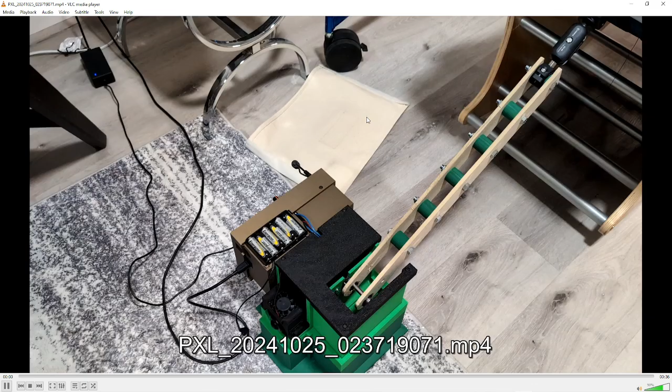So this is a child here in the custom rocking chair with the right padding and all that stuff, covers and everything. And then you can see this green box and this wooden arm that's going out, that's actually rocking the chair. So that's the automatic rocker that I designed. It has various speeds. Right now it's going probably closer to the faster speed here. You can see, and it's working well.

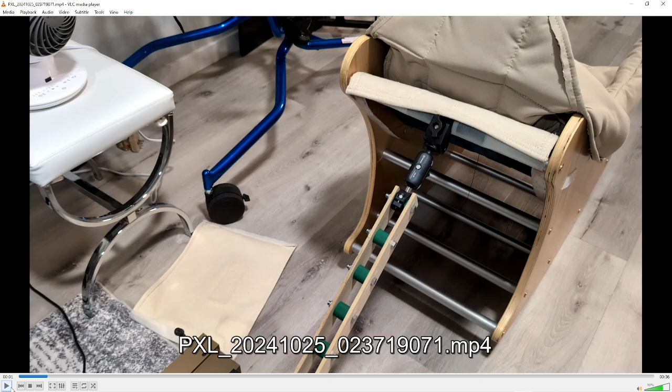Based on his growth, maybe we might need to think about getting a bigger chair again, but something like this arm will be able to adapt to those other sizes. You might need to change the arm length, but that's a very easy thing to change.

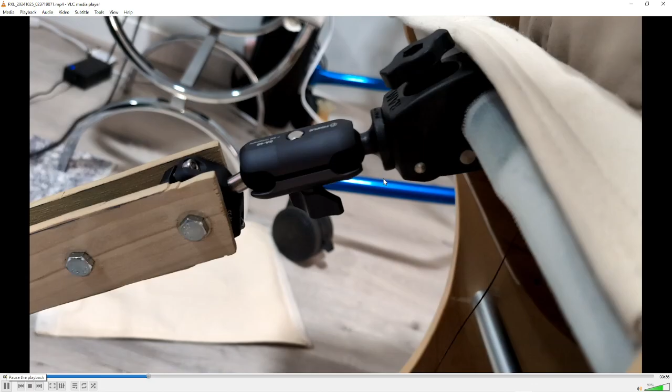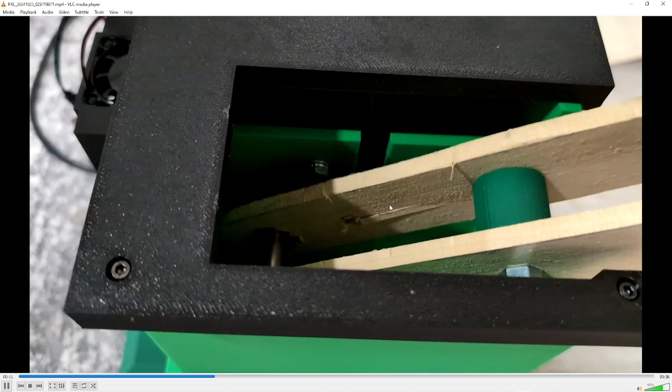Okay, so that's kind of the why and the purpose of all of this. Here's a closer look at the solution. So we've got a RAM arm connection here on a RAM clamp. That's going to the back chair bar. That's rotating on a motor here on a crank arm. And that's all in a 3D printed housing.

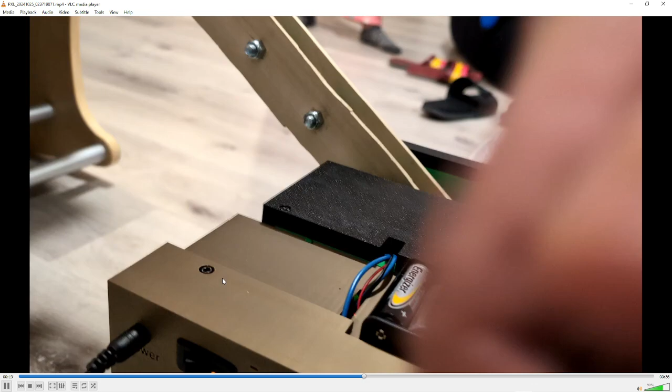And that brown box here has all the electronic controls for speed control and current and all that stuff, which I'll get into. And you can see here you can turn the dial left or right to get it faster or slower. So you can bring it right down to super, super slow, like barely crawling, and then all the way to the fastest desired speed that they'd need. A couple other features on there that I'll get into when we look at the CAD. But that's what we're looking for.

So if you want to make this yourself, you will need a bunch of different things. The first one here, you're going to find everything on my GitHub. At Makers Making Change, we have a template of how to upload open source designs and show them. So they're in these folders. If you want to just get a zip file, you can go to code, hit download zip, and get every file that you need to make this. So 3D print files, all the build files I need, both in STEP and Fusion files. I used Fusion for the design.

Documentation. I didn't make a full assembly or user guide on this. Again, the purpose of uploading these designs here is so someone can make it if they want to. I think that this is a very niche device. If there is higher demand, I'm happy to make an assembly guide, but I just don't think it's really worth the effort at the moment. And this will serve somewhat as that, because I'm going to go through step by step how to build this thing when we look at the CAD. So hopefully, watching this video and looking in the files, you'll be able to get all the stuff that you need to build it. But if you have any questions, email me, DM me on GitHub, or add a note or issue or something. I'll find it.

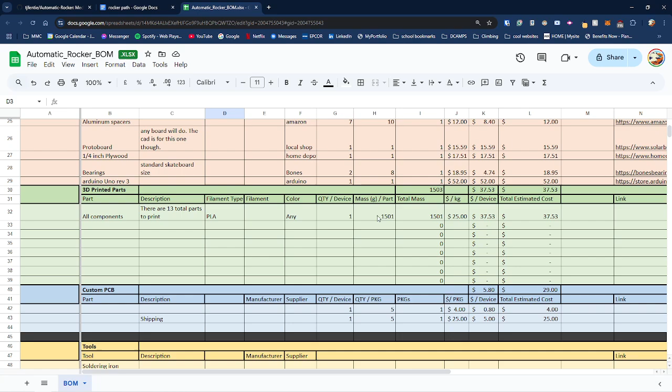tylerfentie@gmail.com. So the documentation of the bill of materials: you get a full Excel sheet here of all of the components that it took to build it. Estimated mass of the 3D printed components, so you can predict how much filament you're going to need. A brief overview of the tools, and most importantly the links to everything. Mostly everything is Amazon. One thing I got from a local shop, but if I was going to rebuild this, I would actually change this part. Again, we'll get into that, but Home Depot for plywood.

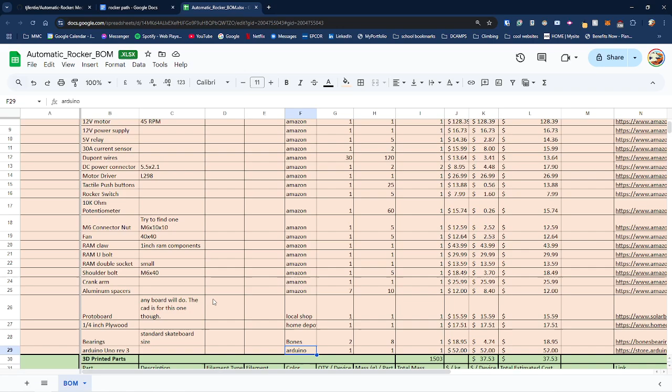Skateboard bearings you can buy at any skateboard store. Bones Reds is what I used here because that's what I had available. Arduino Uno, which you can also get from Amazon, I believe, but I already had one here, so I didn't need to buy one, but you can get it right from Arduino. So you go to the bill of materials, you order all the parts, ready and shipped to you. Then you go to the build files. You can open up the CAD and make any changes that you want. Then, if you made any changes, export those 3D print files. If not, go to your 3D print files, download all the 3D print components, print them out however you see fit, and then assemble it, as I'm going to talk about here soon.

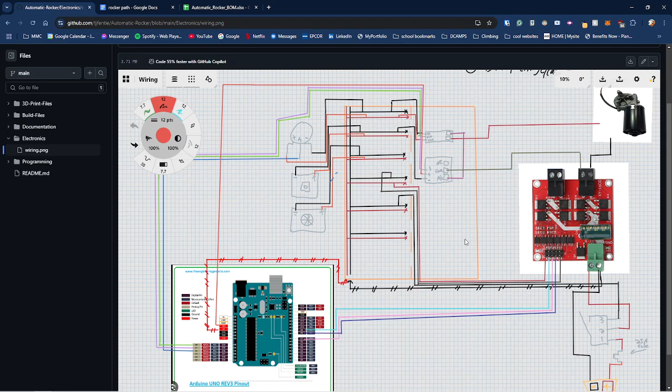I am not an electrical engineer by any means, and that's going to become very evident right here. This is my electrical schematic for all of this. Yeah, I'm sure some of you are probably shaking your heads right now if you're into this stuff a bit more. But this worked for me. Basically, I needed something that I could draw on and play around with, because the biggest challenge I had with this design was learning some of the electrical components. There's been a couple different versions of this, and this was definitely the most sophisticated when it came to the electrical side of things. So you've got the schematic, how to wire everything up here. Again, might not be something you'd want to do on a job, but good enough for me.

So yeah, you got that electronic schematic. And then you get the code. So the code that goes on the Arduino that runs everything basically does the speed control, the automatic shut off on the overcurrent. So if the motor starts binding or the current gets too high, which is indicating something's wrong, then it'll automatically shut off. And there's a reset button, which I'll show a little bit later when we go back to that beautiful schematic that I have there.

So this is what I came up with here. So we're just gonna go through this piece by piece and explain what these components are. This red bar and this blue piece up here is just the path that you just saw before, where this blue thing is at a 40-degree angle, and then this bar is just simulating what the bar of the rocker would do.

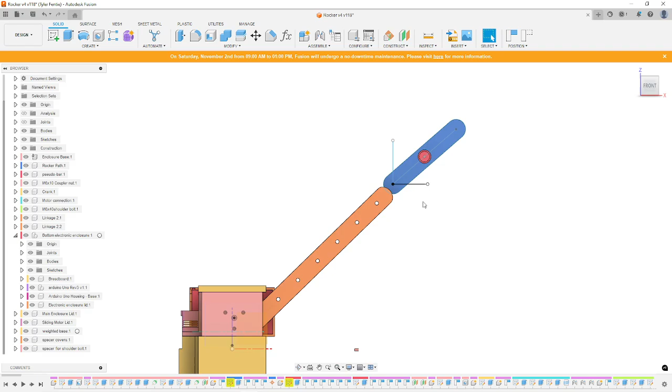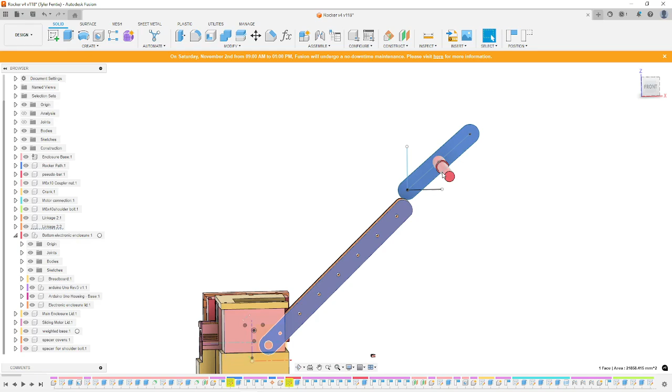I didn't want to model the whole thing and the rocking motion and stuff, so this just gives you a good enough approximation. These two are linked together with a joint so then you can kind of show that motion. It's like a revolute joint around here. So basically, if you look at this linkage piece, it would go here and then go fully around this bar. But I cut that piece off after, so the joint still stands.

But I was able to get an actual model of what I want the linkage to look like. But I'm getting ahead of myself. That's what this is up here. So if anything, we can just forget about the bar and the rocker here, because these are the components that we have. We have two little small floaty components down here that are just used as spacers. Less important, but we'll get to them.

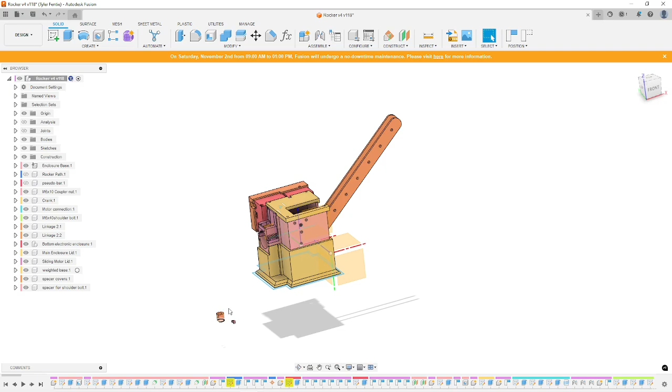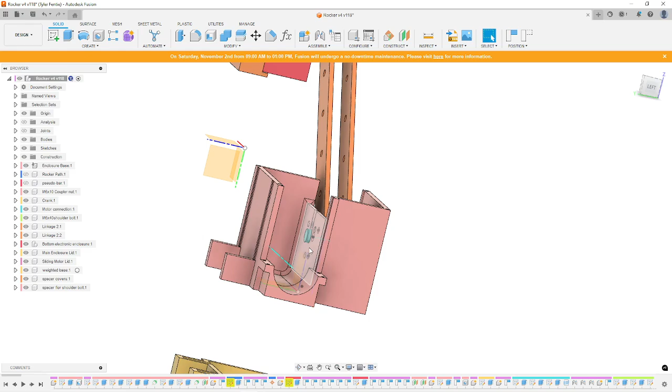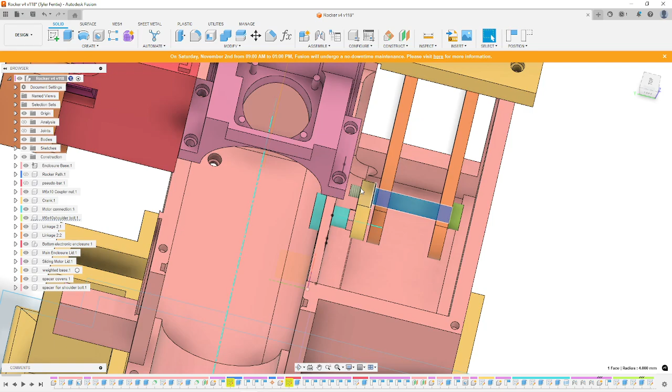Okay, so let's move everything off. Start off here with this pink, salmon color base. This blue knob is simulating the thread that came out of the motor, and then that is a connector nut threaded on here, and that went onto a crank arm. That went to a shoulder bolt that was threaded through, and then bearings were in between here that allowed this to move around as you saw in the video.

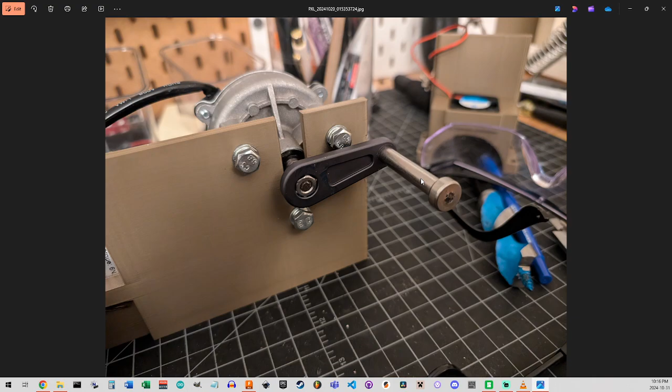So the motor sits in here, and with these three bolt holes, it's able to fix there. That's just something that came right from the motor. I have a photo of that here. This is just a test print when I was testing for alignment. So you got the motor here and three holes, and those bolts came with the motor. So I just made a little faceplate, and you can see that's the coupler nut there that I forced through this crank arm, and then I put that shoulder bolt on there.

So before you actually put the shoulder bolt on there, you would slide the bearings through and the wooden arms that would go to the rocker. But that's basically what that connection looked like. So that's the main housing. Some other stuff on this side, which let's actually get to next.

So here is this electronic housing box. Yes, it is ugly. Yes, it is bigger than it needs to be. I had this thing laying around, and the cost, I mean, again, it's a volunteer project. TETRA is supporting and paying for these materials, so budget was definitely a constraint here. So this is just the size of the proto board where all the electronics fit. So I put that in this 3D printed housing.

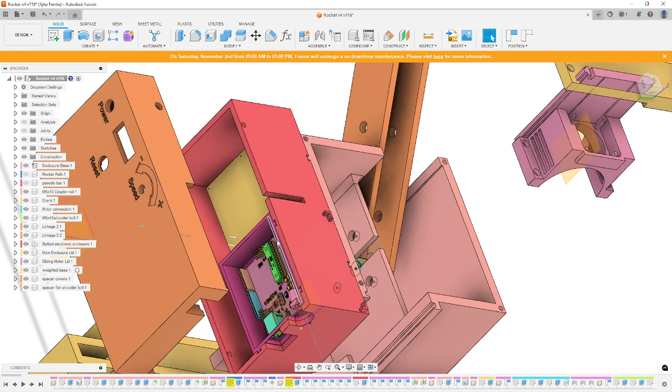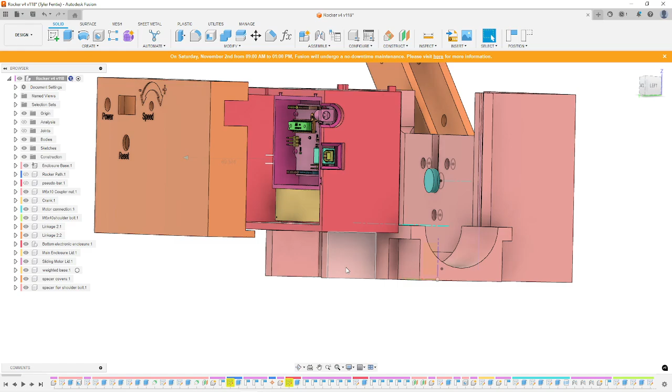This is the Arduino in another housing here, which I don't really have a joint to animate, but this slides in on these dovetail joints. So you got this electronic housing here that slides onto these other dovetail joints coming out of the main housing, and then those rest on these extrusions that I made on the bottom, just so it doesn't go all the way to the bottom, and adds a little bit of support so it doesn't hang off or do something weird.

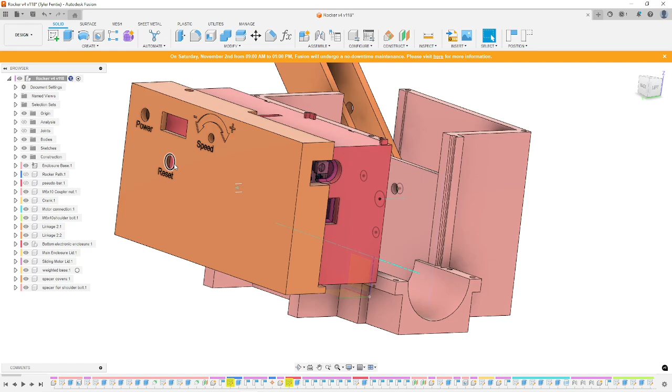And then you got the lid there that goes on and protects the housing cables and stuff. It also has cutouts for the potentiometer, the on and off switch, the power adapter where you're plugging in the 12-volt power source, and a reset button. We'll get into what all those do. We're just looking at the components here so you can get an idea.

Then we got a base that goes on underneath it. So the ground is here, the main parent component. So this goes on. Inside here, there's a bunch of empty room, and that was filled with sand and metal chain to add some weight. Just the motor and the electronic housing themselves aren't heavy enough to not rock with the rocker or get pulled along.

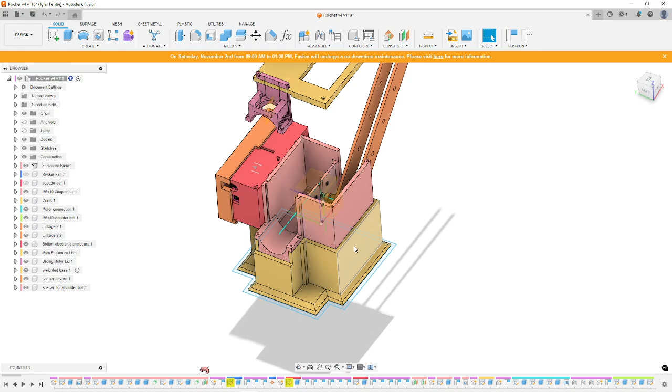So I added this weighted base here that fits on and has three mounting holes. On the top here, you can see there's matching ones. So you would put your bolts through there so the base doesn't fall off. It all just becomes one unit. It's got a false bottom, so you can add some weight.

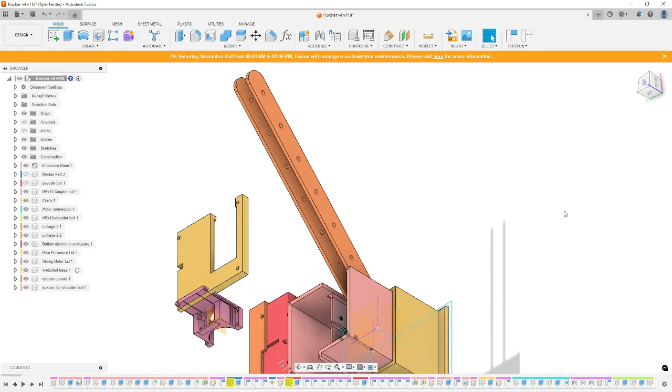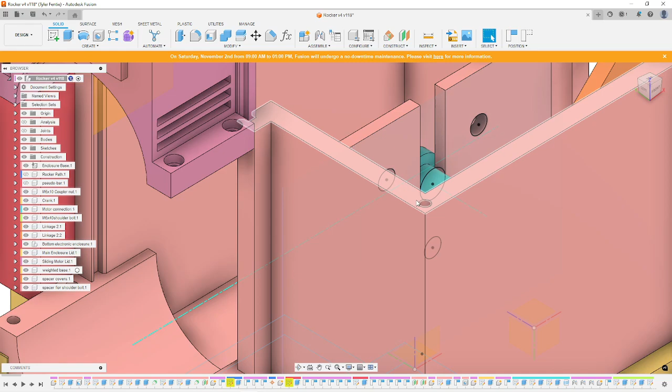Okay. Then, so you have all this stuff. Now we just need to close it up and add a lid. So we got this sliding component here, which also has threaded holes here that you would put a bolt through, and on any component that you see here that just has like a regular hole that you think you would thread something into,

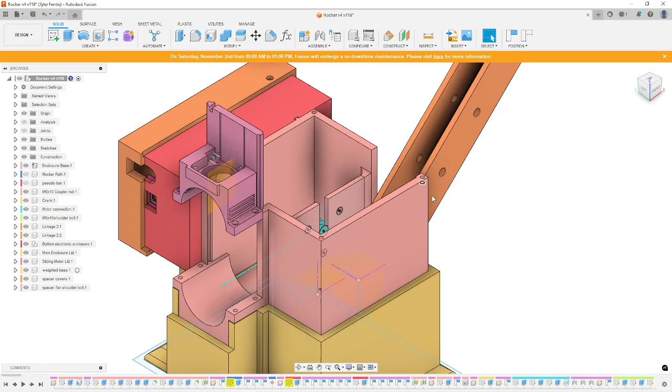I put threaded inserts on all of these, heat threaded inserts. Probably saying that wrong. Brain's not working right now. But yeah, you put the threaded inserts in there, and I just heated it up with a soldering iron, pushed it through the 3D print, and then you could put the

bolts through it. So I can't remember the exact size. I have checked the bill of materials, but the diameter is 4.4. So yeah, I have to check the size of the inserts again, and add that to the bill of materials.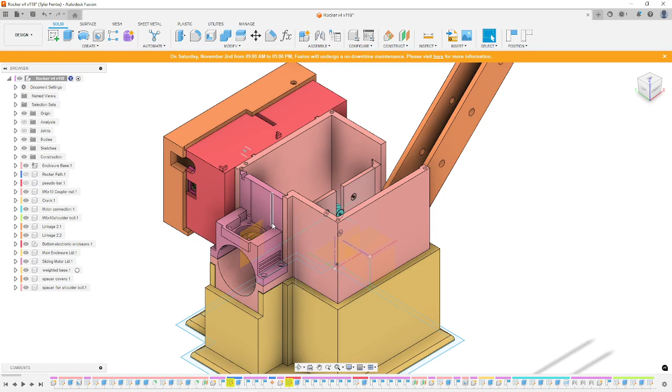So this here would slide down. So we got the 3 bolt holes on this side to keep the motor in place, but the back side also, just so it doesn't rumble and shake. And so this piece is covered here. And then also there's this insert here for a fan, for like a 40 by 40 by 10 computer fan.

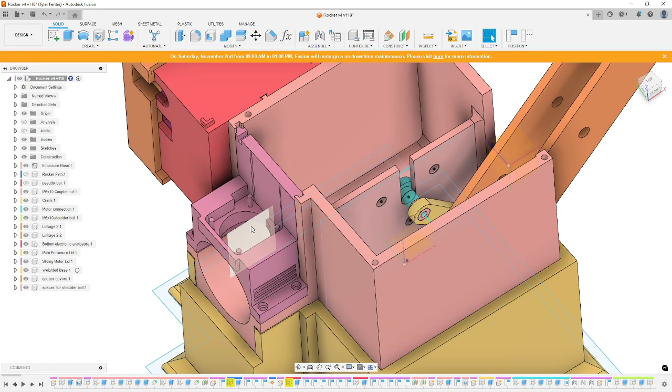The motor never in my testing got even close to its operating temperature or anything, but again, the family might be using this for extended periods of time, so I added that there. You put the housing in there, and then this little cutout and this little cutout on the side here is for the cables to run through. Again, not the prettiest thing in the world, but it did the job.

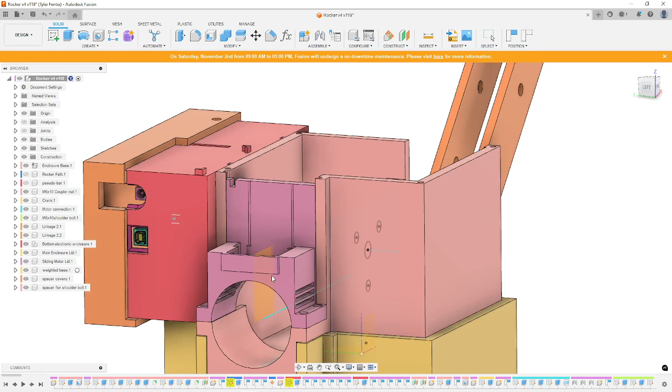Yeah, heat kind of vents on this side. So that slides down, and then you just cap it off with the lid, and the lid goes on there. And there's a little bit of a gap there because again, wires and stuff coming through, and there was a little bit of the support material that goes through here, so this didn't actually fit completely flush.

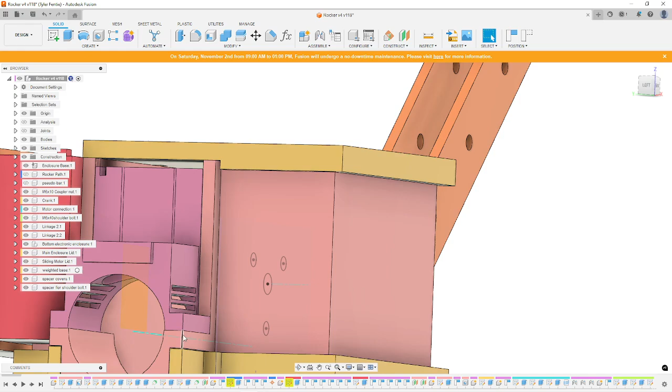So I wanted a little bit of play, so the bolts have some room to go, and again, a little bit more heat escape there. I mean, you have this massive thing open, so it wasn't really an issue, but I wanted that play there, basically. That's what I'm trying to say.

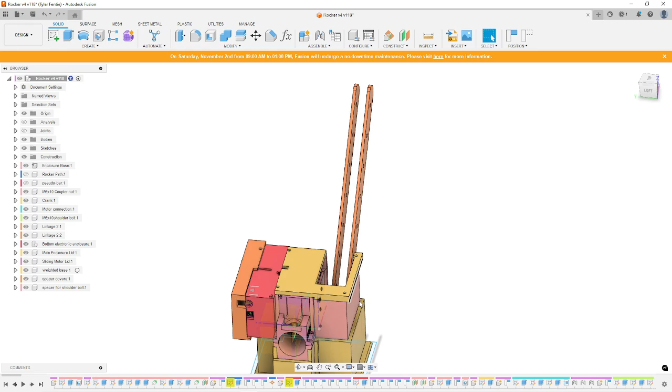Okay, then you get to linkage arms. So the linkage arms have, let me see if I can get a good view here. Right here. They both have cutouts for the 22 millimeter outer diameter bearings. So you'd press fit those bearings in, and then that just becomes one thing.

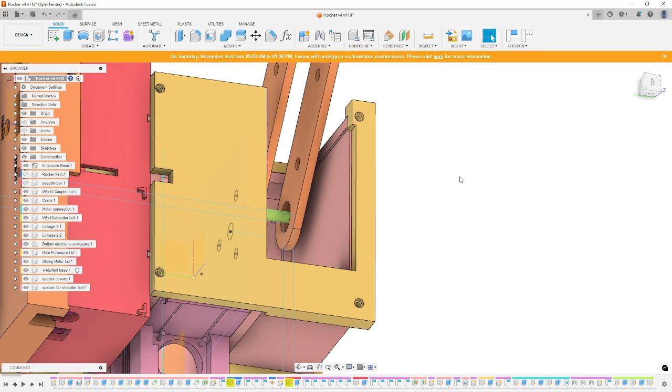You could make these linkages out of anything. Ideally, I wanted to make it out of acrylic, so that press fit would be a little bit more exact. It would look cleaner, be a little bit more rigid than wood. But again, cost and time constraints. Ended up going with wood, and if that becomes a problem for the family in the future, then we'll talk about that with TETRA and see if we can get an acrylic solution.

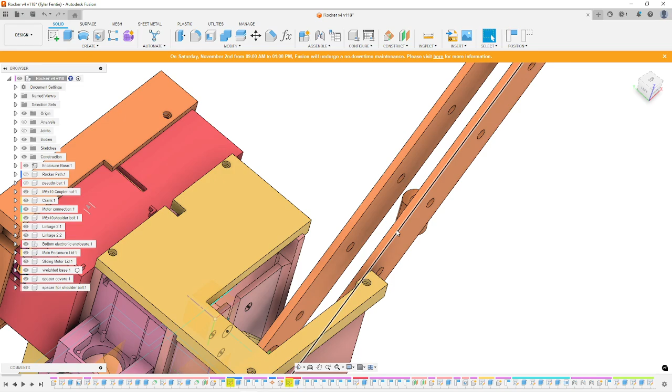So I don't have it modeled here because this was kind of a last minute thing, but these are spacers here that go in between the 2 linkage arms. Mainly for stability, but also so at the very end here you have a linkage that you can attach those arm components to. So we go back to that video.

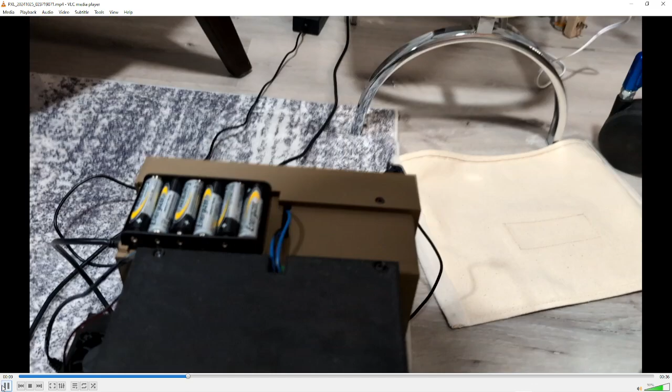And again, down here you can see the crank arm, the bearings going on that shoulder bolt, and yeah. One of my coworkers made a really good point here, that this piece should be covered with maybe some flexible plastic, like a kind of rubber cover, just so it doesn't interfere with the linkage, but also avoids pinch points. Totally agree with that. And next time in Edmonton, we'll swing by their place and see if we can get that done.

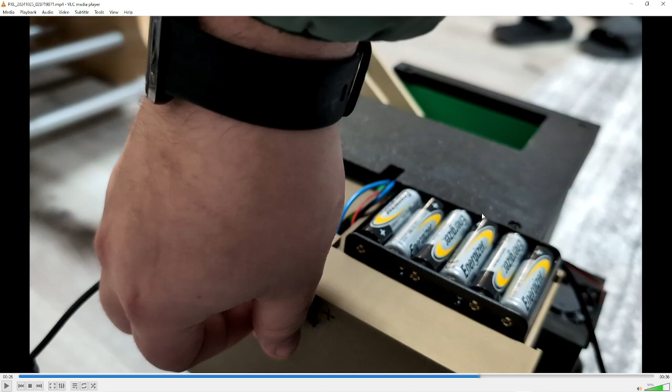You can see here those cables running through the right pieces, and then that fan component in that base. I know there's a better... there it is, right here. Fan component, wire going up through here, and then these two blue wires are going to the motor. The batteries here. So this was a design flaw on my side.

So the power is coming from the 12 volts that ends up powering basically the motor driver and the motor, but not the Arduino itself. It gives some power to the Arduino, but not enough to run it. That's my circuitry design issue. You could definitely have just one power source going in and run the whole thing. However, this just goes to the more motor components.

This battery, you can plug into the Arduino on the left here, and then run the Arduino off these batteries. Works totally fine. However, I found the batteries died a little bit faster than what the family wanted, so I supplied them with a cable that goes directly into the wall outlet through USB to the Arduino too. So the Arduino is being powered through the wall, and there's also another 12 volt thing going to the wall. So two things going to the wall.

Power saving thing is kind of a nuisance and non-ideal scenario there. So that definitely could be improved. That's an opportunity for improvement there for sure. Let's see if I can get a still of the electrical design here. Oh, there you go.

I don't think I'm missing anything there. So that's kind of the housing design. A couple nuances and stuff you'll find if you're looking through the designs. And again, it's open source, so take it, remix it, make it better. All those things. This is not the best version of what this could be.

So let's take a look back at not the programming side, the electronics. So we got the Arduino, the brains of the operation here, and then we got a motor driver that is supplying all the extra current and voltage and all that good stuff that the motor needs to run. That is going to that on and off switch, and then I also have a 25 amp fuse there. So if the overcurrent sensor setup that I have there isn't working, it'll blow the fuse first if it goes past 25 amps.

So that's another safety protection piece. That's the power that's coming out. You got brains and computer stuff going to the Arduino from the current sensor. So current sensors up here, relays down here. I tried to label those as best as I could, so if you get those parts, you'll be able to figure out what wires go where.

We got the fan here on the bottom. We got the tactile switch here, the reset switch here, and then the potentiometer on the top. Again, not standard notation, not standard drawings, but it should be enough to go. In the middle is the proto board, or like the solderable breadboard.

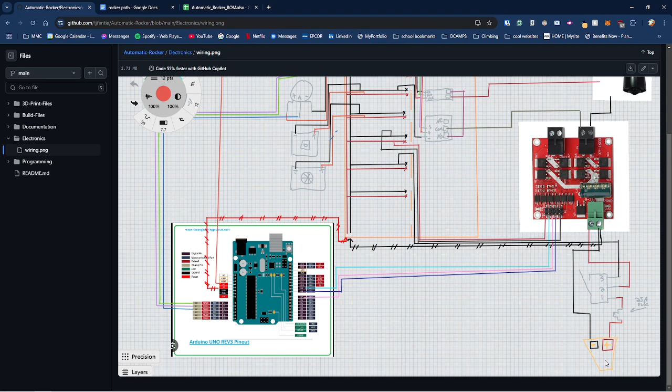So the proto board, the current sensor, the relay, the Arduino, the motor controller, and the motor are all hidden in the enclosures, and then the potentiometer, tactile switch, the fan, the on and off switch, and the power input for the Arduino are all showing outward. Also the USB is showing too, for the reason of this.

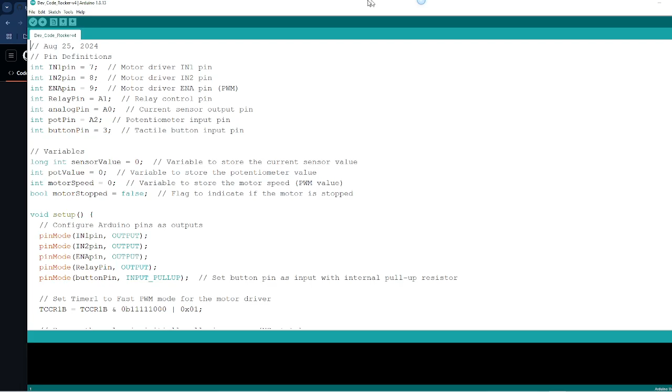Let me just pull up that Arduino code here quickly. V4 final. Okay, so if you're looking at the code, if you're using this yourself, the only thing that you're gonna have to change is the value. Which value is it here? Down here, your sensor value.

So this is the threshold that you can set for the readings that are coming in from the current sensor. When the current sensor is operating, it's gonna be reading whatever value it's reading. Say it's at 400 to 500, right? But then you put a lot of load on it and it starts binding, and it gets past 600. You can set that threshold, so anytime it gets near 600, it's gonna stop.

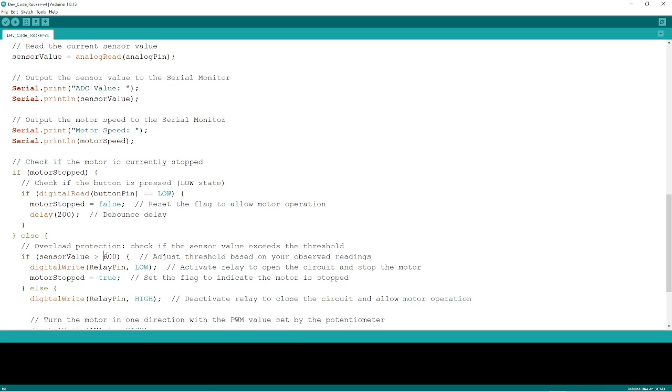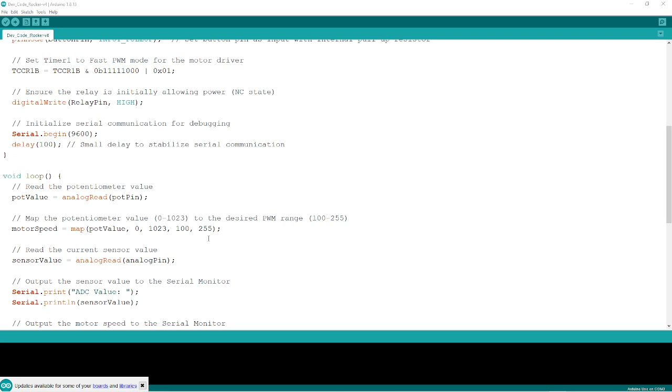So this required a little bit of playing around with when I was doing the setup. I had the laptop out, and had the kiddo on the rocker, and initially it was shutting off because the value I had was too low. So you're just cranking it up until you feel like it's in a safe location. A bunch of other stuff happens in the code, but basically that threshold is the value that you want to change. Everything else should be totally fine, unless you want to change the way the potentiometer is doing the different speeds, and the PWM range and all that other stuff. But yeah, that's the code.

That really should be everything. You got the programming, you got the electronics, you got the documentation, you got the build files we went through, and then the 3D print files. These aren't in the orientation that you would want to print them in by default. Every printer is a little bit different. These are all the 3D prints on my Bambu here, for example. So first build plate, you're looking at somewhere around 11 hours. Next one, you're looking at 10 hours, about 2 hours, and then 6 hours.

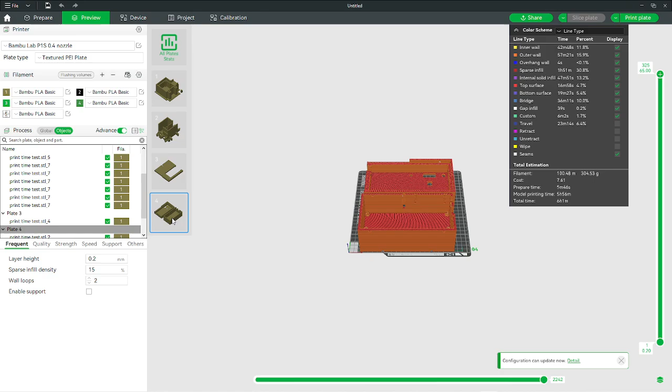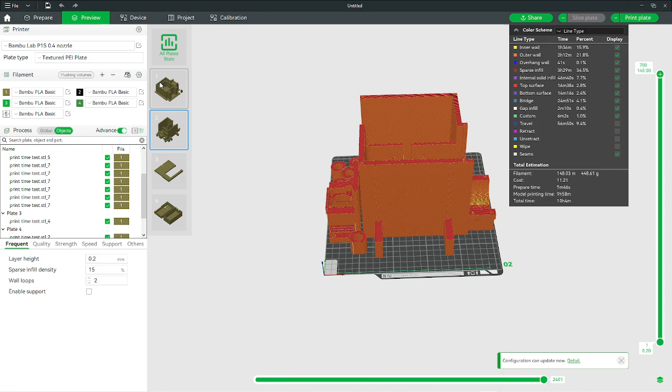So it definitely takes a significant amount of time, cumulatively, to put this all together. Really, the only support required is this sliding bit here. I printed in this orientation and had the film in here, but you could definitely flip it and do it the other way. Whatever you want to do. And again, it took about a roll and a quarter, roll and a half to print all of this. So again, substantial printing for a design like this.

But yeah, that's really it. At the end of the day, it worked. It's still working, as we know right now. And if there's changes we need to make in the future, it's totally fine. Happy to work with the family on that.